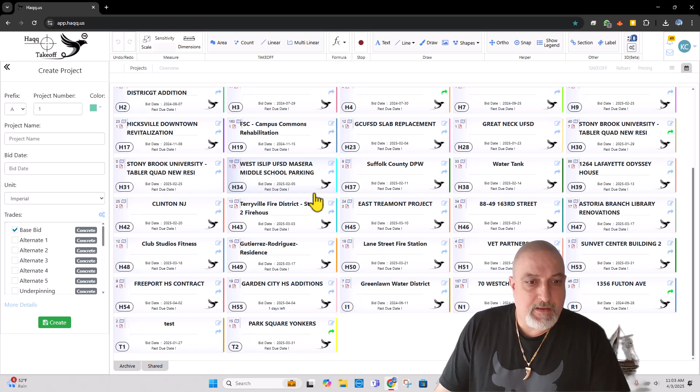Okay, let's get started. Let's sign in first. Takeoff. My applications. And Garden City. H55. And we were right here. So far, let's see what we did. F3, F4. Let's continue quickly. We got this. F4, F5 now. F5.0.

Square footings, column footings. And this is 5 by 1 feet. And what is the elevation for this? Bottom elevation, F5. Where is F5? We need just one. And these are at the middle. This is at the middle, bottom of footing, minus 1'10". Is there any more? Yeah, there are two of them. Bottom of footing is minus 1 foot 10 inches. 4000 psi. Okay.

Rotate this. Five. We got more F5 here. We need to change the elevation for that one. But we'll do that later.

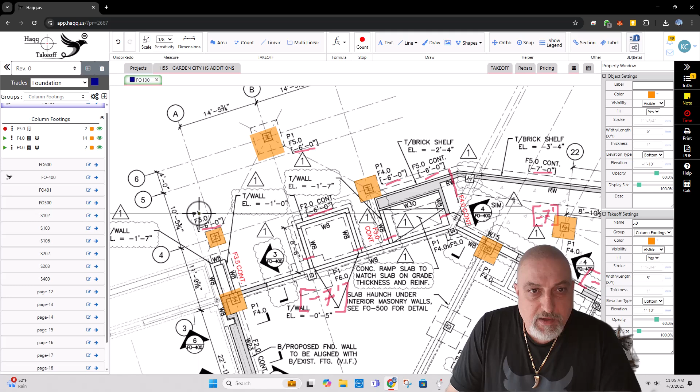Oh, I forgot my microphone. Okay. Hopefully, voice was coming. All right, let's keep going. All right.

And let's change this to bottom of footing is minus 6 feet. And add reinforcing. What's the reinforcing for this guy? Let's do this. 8 number 6. We put 8 here. Times 2 because each way. And save. F6.

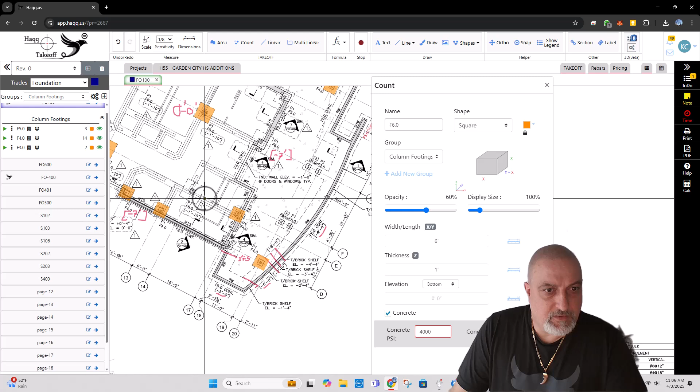0.0. 6 feet. And the thickness is 1 foot. 13 number 6. F6 is 1 foot 10. And this one gonna be minus 7. Minus 1 foot 10. And there's another F5 here. And another one. Alright, let's change this to minus 7. And we had 13 number 6 on this one. Times 2 each way.

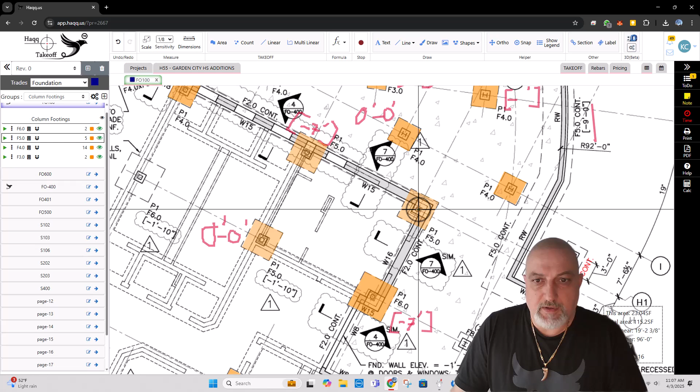And let's add other F5s. We have one here. Minus 7 is the bottom of footing elevation. When I copy this, it will come with the same elevation. So, come on. 7, yeah, correct. Copy. It comes with the correct elevation now. Yep. Okay. Let's keep going. Now combined footings.

These are rectangular. F4.0 by F5.0. These are rectangular. I'm not worrying about XY dimensions because usually X is the horizontal and Y is the vertical way, but these are all twisted, so we have to rotate them. So you can put anything to anywhere. 4 feet for X, 5 feet for the Y. Thickness is 1 foot, which is standard.

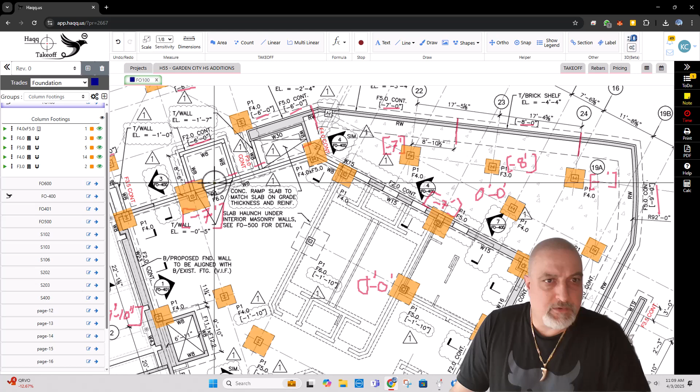And let's see what's the bottom of footing elevation here. 4, 5. Where is 4, 5? Yeah. Minus 6 feet. Okay. Oops. Kind of like this. And there's another F6 here. This F6 was minus 7, so I cannot rotate it. Rotate and move. So that is taken care of.

And let's go back to this and add rebar. What we got here? Number 5, 12-inch on center each way. So XY direction, this is 12-inch on center, spacing 12. It's number 5. This is the 4 feet direction, the short way. Change the direction to Y. This one is X. Now the other way. And the spacing is 1 foot. Change the size. And it changed to 5 feet. So this is the long way. Save, done.

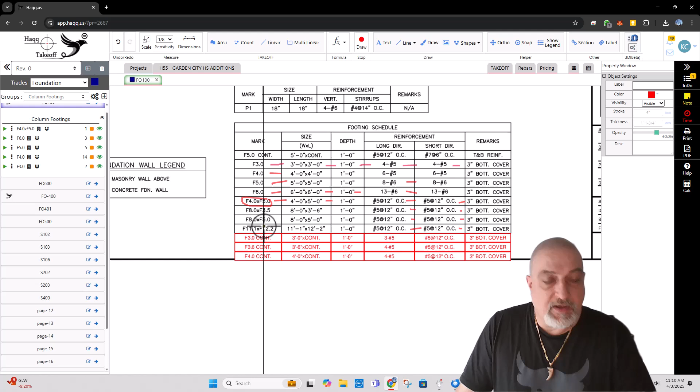Next is the reinforcing. We can copy the reinforcing. See, let me click this. Since reinforcing for all of these are equal, number 5 at 12-inch on center, standard, constant spacing and the size, I can copy the reinforcing from this when I create these. Okay, let's do that.

So we got F8.0 times F3.5. This is 8 feet by 3.5 feet, and the thickness is 1 foot. The bottom of footing elevation for this 8 by 3.5 is here. This is minus 9 feet. Click OK.

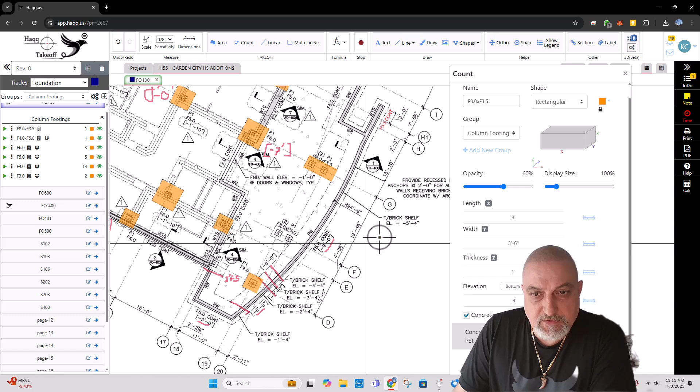Scale is not fitting for some reason, 3.5. Let's just check our entry. We got 8 feet by 3 foot 6 inches. And this is 8 by 3.5. So the drawing must be incorrect, a little bit off, but I'm not worrying about it. Our dimensions are correct. So for the reinforcing, I can just copy from this one now because it's standard. Copy and go here, show rebar, paste.

Let's check it just for you guys. 4 number 5 because it's 3 foot 6. You got 4 number 5 at 8 feet. And the other one, because 8 feet long, it gets 9 bars, 9 number fives, and the size is 5 and length is 3 foot 6. But this wording is not correct, which is okay.

David, okay. Got a phone call. Let me pause this for a second. A lot of distractions. Okay, let's get back where we were.

YX, 3 foot 6 short way, yes, and this gotta be the long way, right? It's not important, just for good work. All right, let's see what else here. We did the 8 times 3.5 and another one 8 times 5. This is another footing right here. 8, 5, and 1 foot.

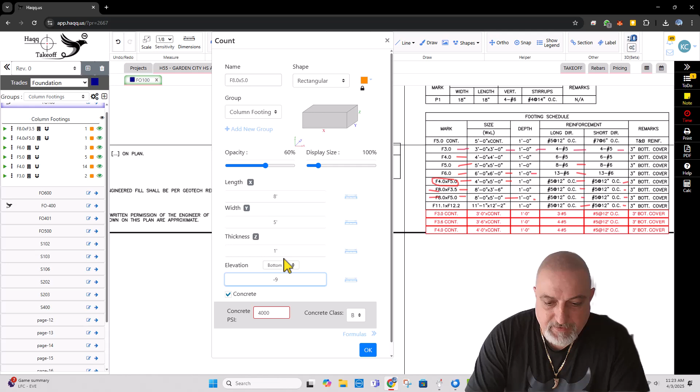F8.0 times 5.0. 8 feet, 5 feet, 1 foot. It's gotta be minus 9 feet. Let's check. Yeah, minus 9 feet.

Yeah, something wrong with this. But if you look at these two, looks like the same dimensions, like this width, and this is 3.5 and this is 5 feet. I don't think they drafted this correctly. Yes, they made it 3 feet. Anyway, let's pass the rebar here.

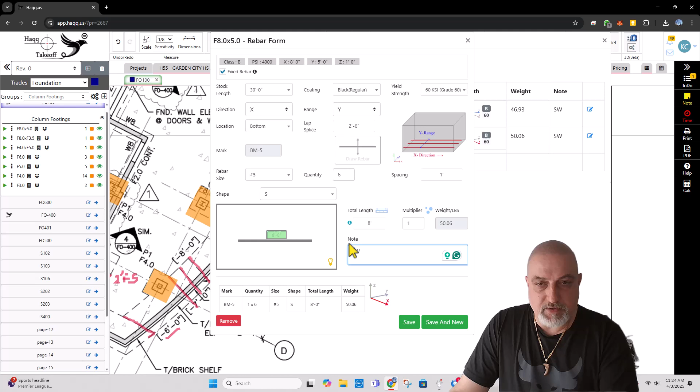Okay, same thing. This is gonna be short way. This is gonna be long way. That's the only thing we need to change. You don't even need to change this. I'm just doing it. Okay, we got the F, and lastly F11.1.

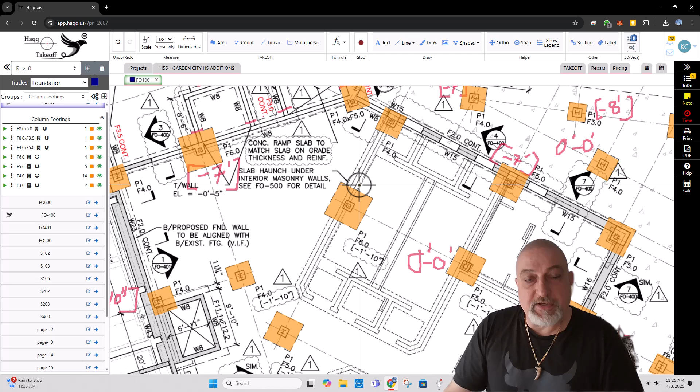Where's that guy? It's supposed to be bigger. 3.5 continuous footing. I can't see. Oh, so I'm missing another F6 here. Yeah. Good thing is Haqq Takeoff, it covers the whole footing. It just doesn't put it like a symbol, little symbol. It covers everything, so you see if you're missing something. That's beautiful.

And let's see what's the bottom of footing for this, 1 foot 10. That's perfect. And I still can't see F11. It's gotta be somewhere. So let's keep going. It will show up hopefully. 12.2 is a wide footing too. There you go. That's the pit. And the bottom of footing.

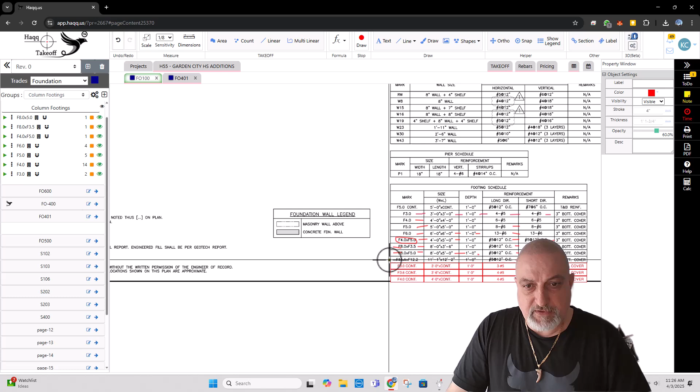Do they give you one? FO401. Let's see this section. FO401 is right here. Top of existing footing. So it's not giving us, and we already figured this. It was minus 9 foot 10 from part 1. So let's do this one. And the reinforcing is the same again. Yes, reinforcing is the same. Let's set that.

F11.1. I mean, most structural engineers don't consider this as a footing. It's a mat slab, but this one does. 12 foot 2. So here 11 foot 1 inch, 12 feet 2 inches. And the depth is 1 foot, and this was minus 9 feet 10 inches. Goes under the column footings. Yep, that's what we have to do.

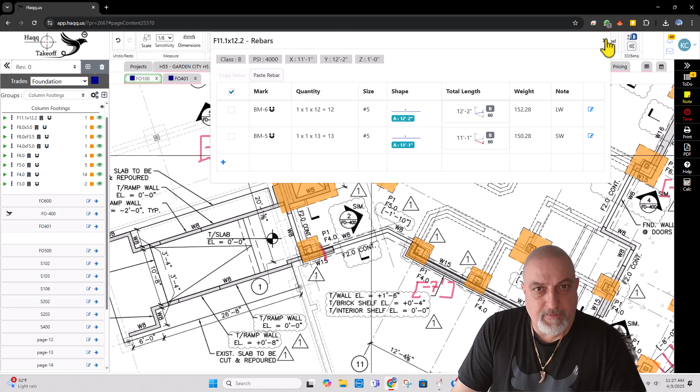Let's twist this, rotate this guy. And add the, no, we need to paste. And now it matches long way, short way. Is it top and bottom on this one? No, still one way. Now let's add continuous footings.

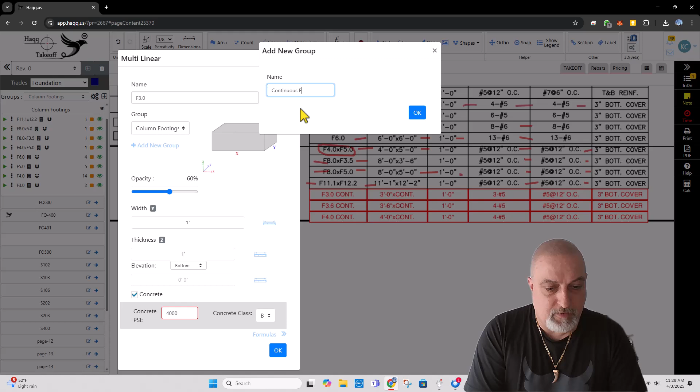Let's start from F3.0. Create a new group. We call this continuous footings. You can call them wall footings. I call them continuous footings. 3 feet wide and 1 foot deep, and I like brownish colors for these footings. Okay, where's F3? F3 is F4, F2.0 here. I didn't see F2.0 in the schedule.

You know what? Let's try to find F3. Still F2.0 here. F3 is shown here. Oh, yeah. This is F4, he says. Just gonna try this. This is 3 feet. And that's 2. Okay, so it's minus 6 feet. This area, no, this one is minus 7. There's a step.

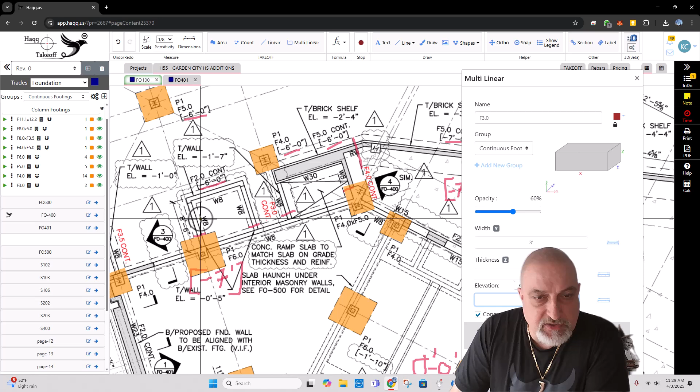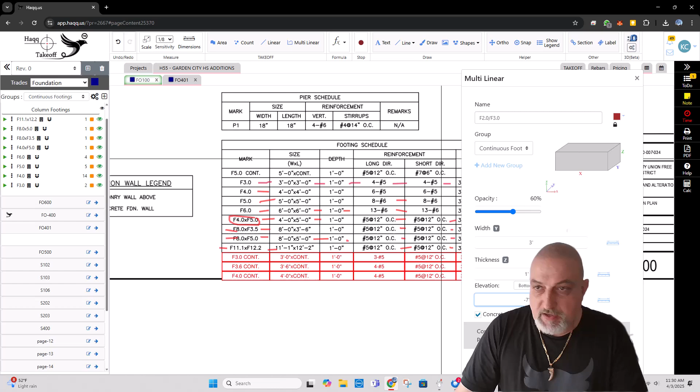So are we doing this or this? Looks like we're gonna do all F3 because there's no F2 in the schedule. We're gonna use F3. That's the closest one. So I'm going to call this minus 7. What are we gonna do about the F2.0? There's no F2.0. So I'm gonna make this F2.0 slash F3.0, but I will use this footing. I'll get some extra, which is okay for unforeseen things. And I got the minus 7.

Let's start from here, going back here, turning for the F2, and still got F2. You may think I'm doubling up on the footings, but not actually.

Another phone call. Hold on a second.

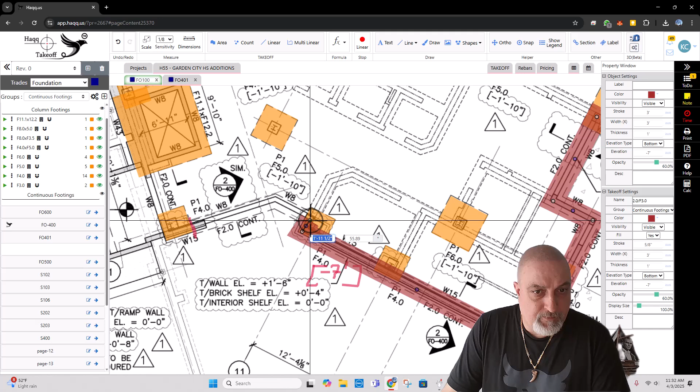Okay, where are we now? Keep going here. F2.0 again here. And footing changes here. We have a step here. Okay, what we'll do on these steps. Okay, let me. Is there a step detail on this? I don't think so. Yes, they have a step detail. Perfect.

All right, let's set up a scale for this page. Okay, we are looking from the top. When we are at the step, currently we are looking from the top. We're gonna change step from -7 to -9'10", right? So these are bottom elevations. Let's look at this. We got here -7 and -9'10". Actually, the other way around.

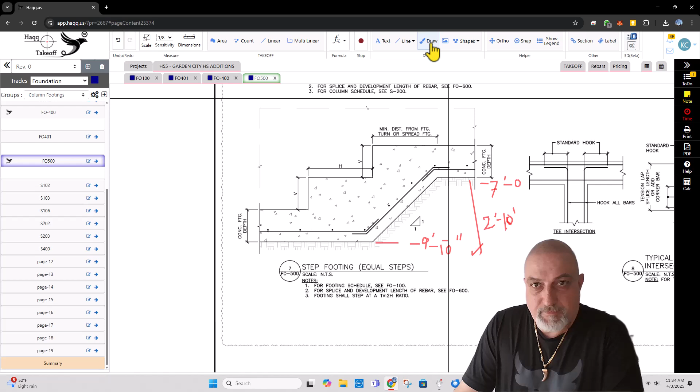-7, -9'10". So in between we got 2 foot 10 inches. So first step will be 2 feet and the second step will be 10 inches. And we are looking from the top. So when we do our takeoff, we're just getting this top area. So we need to add something for this. How we're gonna do it is we will extend this bottom footing to the underside of this second step. Our footing thickness is 1 foot.

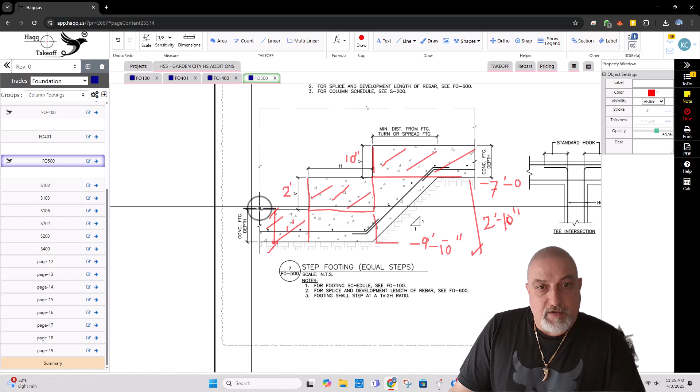Okay, so let's change the color a little bit here. First thing, on the lower side, we got the -9'10". We need to go up to the first step. So we're extending this here underneath this second step. Let's do that. Let's add this F2.0. Where is this continuous footing? So here you go.

So we need 2 steps here. First one we have here, and we need 4 feet in between the steps. So I believe this is 4 feet. And should we get back a little bit? Yes. Let's get back like 4 feet.

3'6". And let's draw this as F2. It's F3 right there. I go up to the middle. Actually, it sounds like here. Somewhere here. Oops, not delete. And this is -9 foot 10 inches.

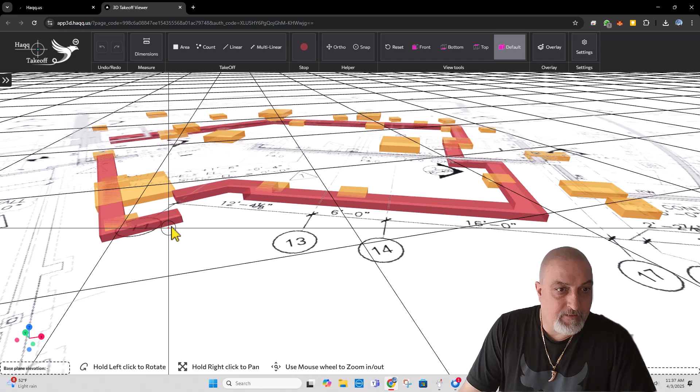Now let's look at the 3D to understand more clearly what's going on there. See, this is what I'm talking about. This is the footing at the -9 foot 10, bottom of it, and this is -7. Now we want to apply this detail. So what we said, we're gonna take this lowest footing up to where the first step is. First step is here. Okay? Now, let's go back here.

Now, between first and second step, we have to add 2 layers because our footing is only 1 foot. And bottom of this footing will be minus 8 foot 10. And bottom of this footing will be minus 7 foot 10. Let's keep detailing.

Between two footings, two steps, we say, right? From here to there. And bottom of first one is minus 8 foot 10. And second one, I'm placing right on top the first one. And elevation for this one is minus 7 foot 10 inches.

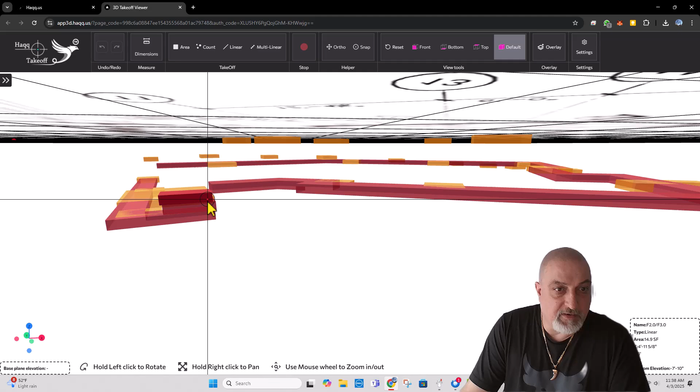Let's look at the 3D. As you can see, we build up something. This is a little off, don't worry about it. We build up the distance between. Now we need to step this up. Now second step will be 10 inches. 10 inches. It will be a little thicker here.

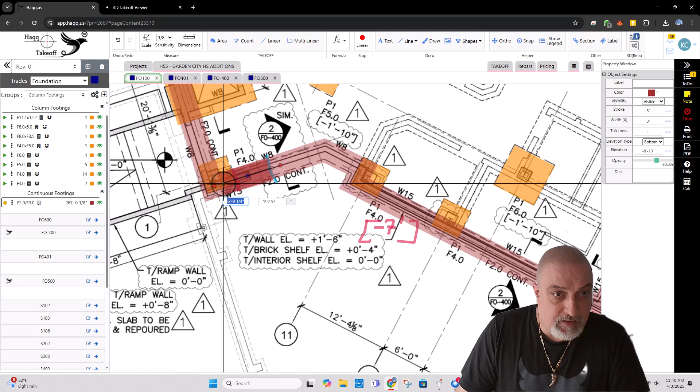But what we didn't do is these two layers we took in between the steps, we should have extended them a little bit more to cover this area, right? Let's do that first, so it can support this footing. It will be undermined. Okay, let's see. Edit. Take it up here, and I gotta send this back. Edit and extend the same amount. There you go. I fix it.

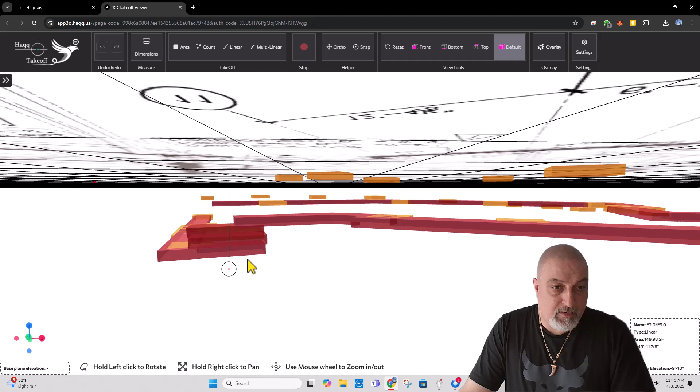Now I'm gonna do the 10-inch step, which will be our latest. Actually, it will create a step. I don't need to do anything, I guess. I just need to extend this up to somewhere here. Bring this to forward. There you go. Now makes more sense. I got 2 foot step here, and one step is actually supposed to be on the angle a little bit, but I got a little bit extra concrete here, which we need for unforeseen things. That's our first step done.

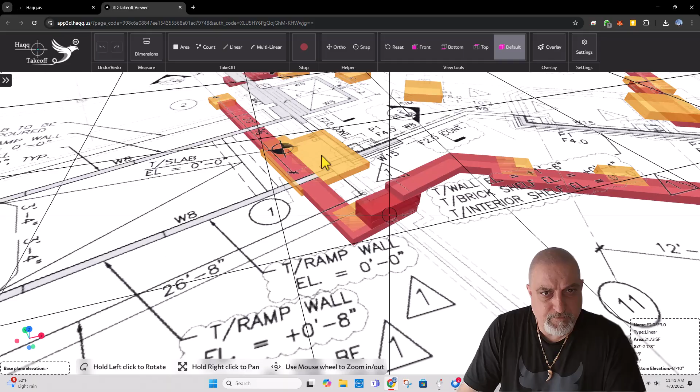Okay, what else are we missing here? These are F2 also. And this is at the minus 6 feet. And we do that first. Let's get them back a little bit here. Minus 6 feet. Minus 6 feet. And this guy is here. There's a foot difference in between. Let's see if I can move this guy.

Okay, we just need to add another footing at the minus 7 foot elevation and take it underneath this to support it. And this is already minus 7 elevation. A little bit past. There you go. And that's it. These are our footing steps. Okay, so F2.0 and F3.0 are finished. Let's add the reinforcing. That will be pretty easy.

F3.0, 3 feet by 1 foot, 3 number 5 continuous, and number 5 at 12 inches on center short way. So the x direction shows the long way. So this is correct. So we have just continuous 3 number 5s. We'll say continuous. Now I want to add corner bars, 3 number 5s, which will use lap splice for the corner bars. When you press L, it uses a lap splice for the number 5.

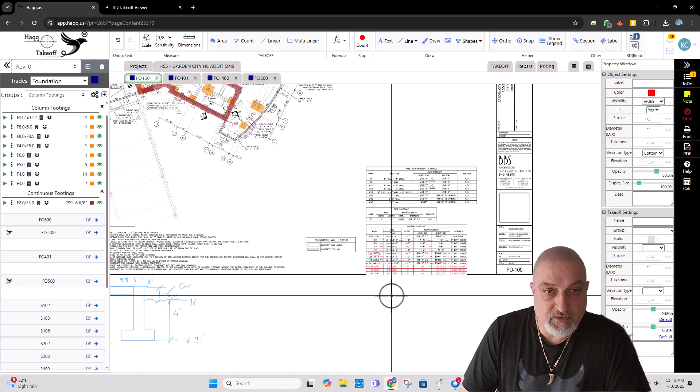And I'll call this corner bars at how many locations? Let's count them up. I will have here, there, a lot of corners. I'm just gonna add here, and press escape. So 17 locations. Now short way, the y direction is the short, which is the 3 feet, and 1 foot on center, 300 bars, because the length is 299. So number 5, short direction, short way. So pretty much we're done with this F2.

And next footing is F3.6. Next footing is F3.6. F3.5. 3.5 feet by 1 foot. And bottom of footing is different. 3.5. We do have here. This is F3 also, so we forgot. No problem.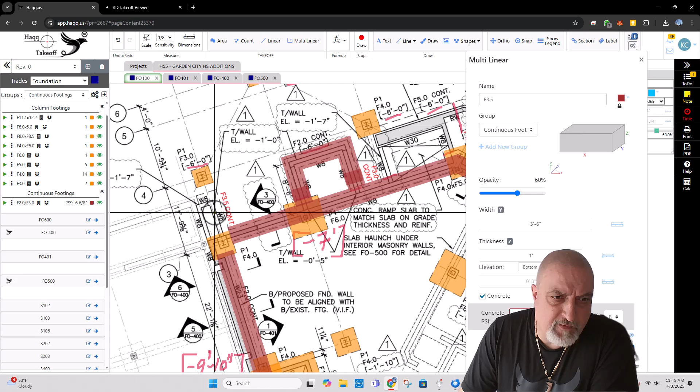3.5 here. So I will say -9, because this is -9, 10. -9 feet and 10 inches. I add 3.5 here. Go up to the end of the footing. Okay, I'm gonna continue with F3, finish this part. I'm just gonna give a little bit here for the step. Change this to -6 feet.

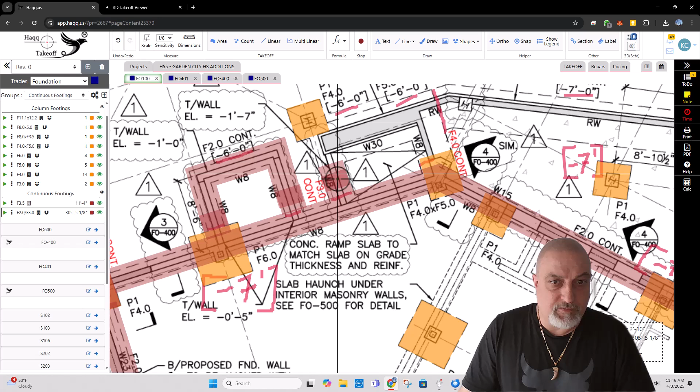And go under on this. So we created the step. This is -7, -6. And all this -6. That's the one at the back, actually. How do we turn this? Let's do clean. Let's reset this a lot better.

Hey guys, here. See, that's the one. Okay. Now F3.5. Do we have that there too? Yeah, this is the part. Okay, F3.5. We have another one here. Let's continue. And that's about it. Press escape. And this is at -9 feet.

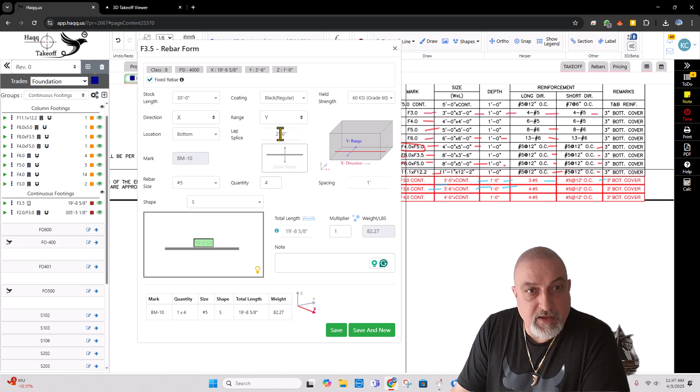Let's add the reinforcing for this guy. What does it have? It says 3.5. It says 3.6 there, right? Yeah. They meant to have the same thing, I believe. For number 5 continuous. The default always gives you the continuous on the footings and the walls. I mean, walls actually consider horizontals. Here, footings, the first default values are direction X and range is Y, meaning continuous bars. Okay, number 5 continuous.

Continuous. Save and new corner bars. Why do I say corner bars? Okay, continuous bars, let's see. This is the footing. Continuous bars are placed like this, right? And like this. Some drawings don't require it, but usually you have to place a corner bar here. That's the corner bar. Okay, now let's place the corner bars.

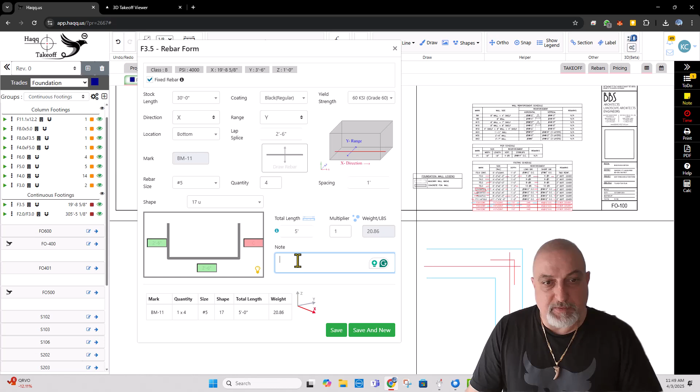It was number 5. We pick up the U shape. We just use 2 sides of it. This is the corner bar, 2'6", 2'6". The extension is the lap splice. When you press L here, it gives you the lap splice automatically. We call these corner bars.

And how many corners do we have on these guys? I have one corner here, and I will have another corner here because this bar is gonna come here, come there. Okay, 2 locations. New, now short direction, short way, 12 inch on center, number 5's I believe, yes. Pick number 5, short way, save.

Okay, another phone call, just hold on. All right,

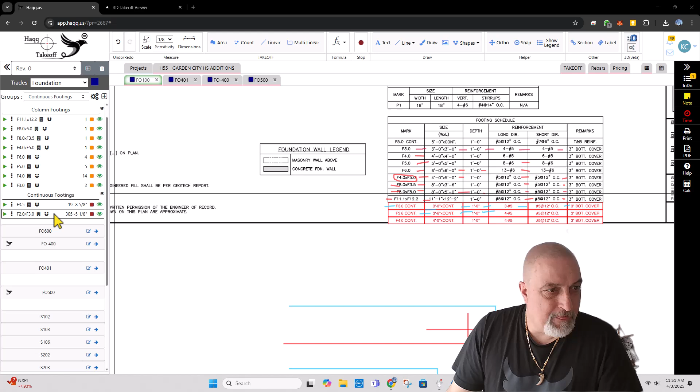let's go back again. F3.5, next footing is F4. F4.0, 4 foot by 1 foot, most likely, yes. And F4.0 is used only here, F5 here. F5 there, F5. Maybe here it doesn't call it, but we're gonna take F5. Everything looks like F5. So here is the -6. -6 feet.

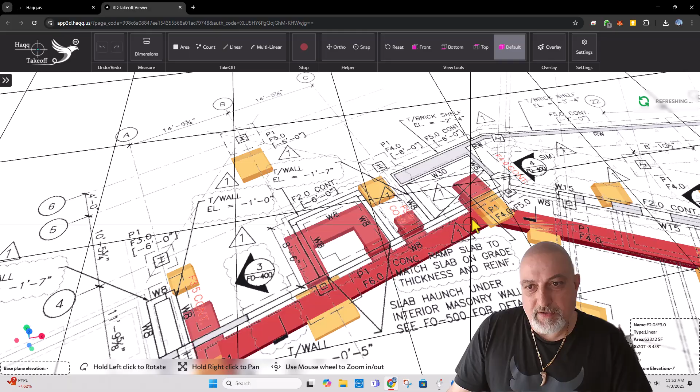F4 is only used here, so I start a little bit back, like this. And I extend a little bit to the underside and call this -7. So we create the step. I hope you guys understand how I created that step. You can see it's there. The column footing is at -7 also. Let's put this column footing at the -7.

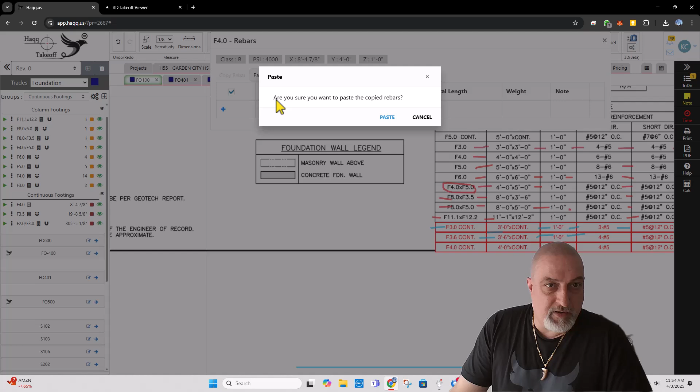I just got lost. Yeah. So that's the column footing. Okay. Now let's set the rebar. One corner bar, obviously. Rebar was 4 number 5 again, number 5, 12 inch on center. Since these two are the same, I can copy everything from F3.6 actually. Copy to F4, paste. Only need to change the quantity of the corner bars to 1, that's all.

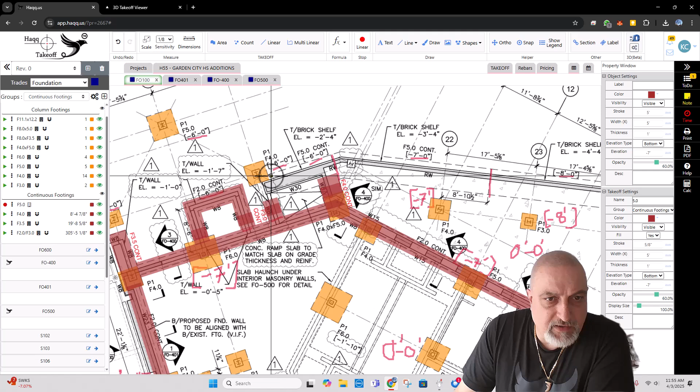We're done. Now we're going up here, F5.0. This is the last footing, wall footing. 5 feet by 1 foot. And it has different elevations, but let's start with -7 feet bottom. Over here, it says -5 feet. Let's start this side, -7 feet, right? There you go. Actually, this is -6 feet also. Okay, we separate it like that.

When you double click, it finishes. So you have to finish the footing to be able to separate the elevations so you can enter different elevations. How do you do this? This looks like an arc, it's not straight. When you press A, it gives you an arc, and you gotta click on the midpoint of the arc and the end. There's no step there. Let's continue like this, and another arc. And this is the midpoint over here. Press A. And we need to double click here.

And this is the lowest one. So the lowest one will go under actually. So we extend the lowest when we're doing the steps. And this is the next step, goes underneath the higher one. And this is the next step, the higher. And this should be the 6. Still on the arc. And this has to go underneath the higher one too.

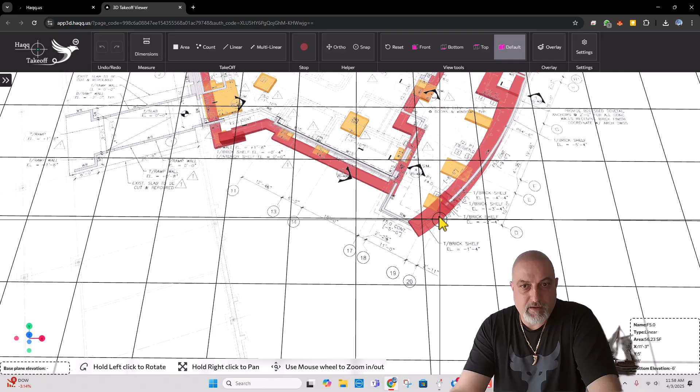Okay. Let's start adding these elevations. This -6 feet. This is -7 feet, which is good. This is -8 feet. -9 feet. -8 feet. Our default is -7, so we don't need to change that one, but we need to change this one to -6 feet. And we are at the -6 right here, right now. Let's reset this. So it looks good, right? We did a good job.

Only we need to extend this. All right, go back. See, these footings need to be supported under the higher part. On the steps, we have to take them underneath. So here, this is the lower part, extending to the higher part. Just a little bit here. This is lower, goes under the higher part. Same thing here. So we covered the step footings. Now let's keep going over here. F5 I'm gonna take from here to the end. Then we're gonna adjust this.

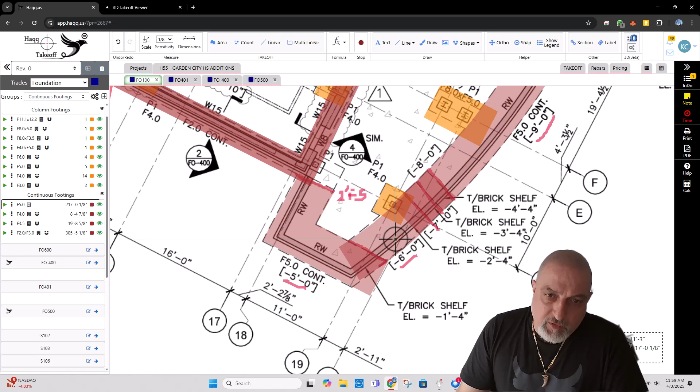This is -5. And we already took lower -6 underneath the F5. Now what's going on here? It goes to the -7 here. And this needs to become from -7 to -5. So we got a 2-foot footing here, a 2-foot step.

So I'll start at the -7. Imagine I'm going underneath the higher footing to support it. But if this is at -5, this is at -7. Footing thickness is 1 foot only. -7, we already did it. So there's a gap of 1 foot here. So I have to add another piece of footing on top of this at -6.

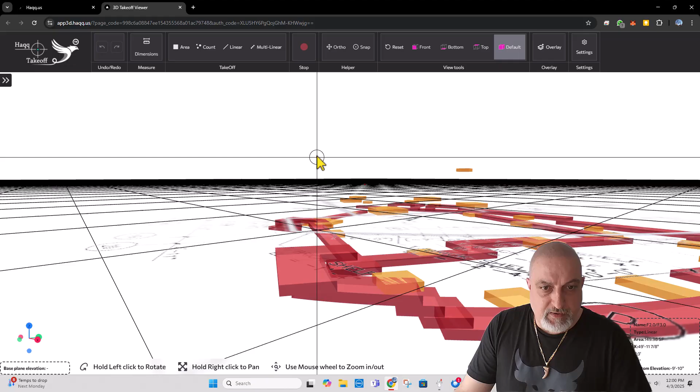Yeah, let me show you before I change it. Let's reset this. Where are we on that one? We're talking about here. See, there is a gap. There you go. This is better. There's a gap. This is at -7, and this is at -5. So we need to create a little piece of footing to support this, which is this one at -6. There you go.

So basically all the footings are done. This is a complicated job. It's already 46 minutes on this video as well. Alright, let's add the reinforcing for this guy. The reinforcing for this is long direction number 5, 12-inch on center, and the short direction number 7, 6-inch on center, top and bottom. Let me see if there is a section here, 1FO 400. No hooks, nothing, so it's good.

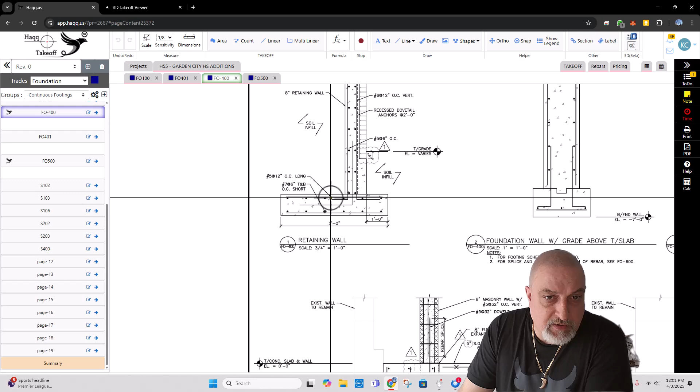But they showed it the other way. They pointed at these as the long bars, these as the short bars, but they pointed wrong. Okay, let's add the rebar. Long bars were number 5, 12-inch on center. So its direction is the long direction, 226 feet in this case. Change the size of the rebar, that's all you have to do. And 12-inch on center, and this is continuous. You can say continuous or long, but top and bottom. Save and new.

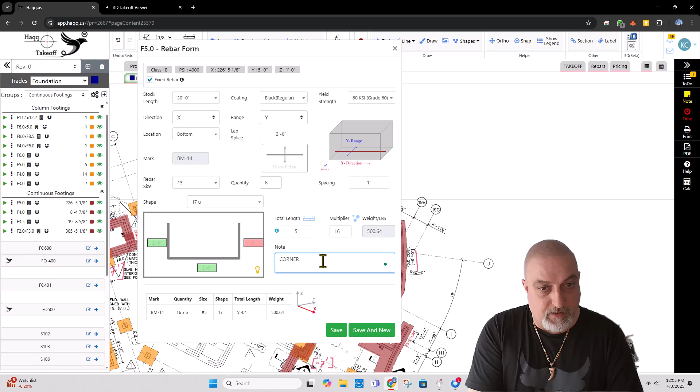Alright, now we have to do the same thing. We have 6 bars, right? Number 5s for the corner bars. Now let's count the corners for F5. We have a corner here, corner there, corner here, here, and there. 8 corners, but since it is top and bottom, I'll do 16. Corner bars, top and bottom.

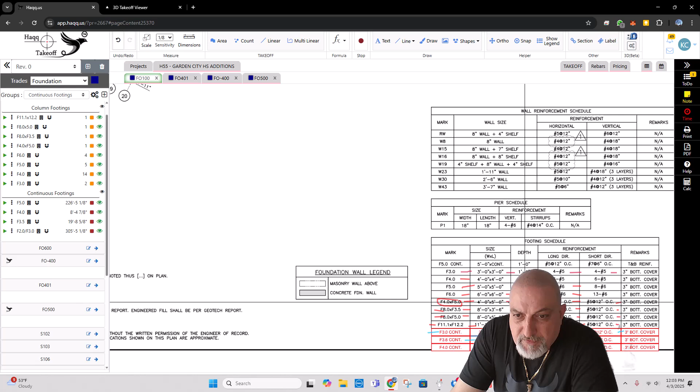And now we're gonna do the short way direction. Number 5. No, it's not number 5. Number 7, 6-inch on center. Number 7, and spacing is 6-inch, so quantity changes, short way, and this is top and bottom. So pretty much we're done. Okay, footing is 1 foot, right? Alright, let me tell you one more thing. Thickness of the footing is, oops.

We have a top bar condition sometimes, not in this case, but let me explain it. In this case, it's a 12-inch thick footing, F5 footing. But when we have a top bar, we have to consider what's underneath. If we have 12-inch concrete below the rebar, then this bar is considered a top bar. Our footing is 12-inch already, and rebar coverage is a couple inches, 2 inches most likely. So we have 10 inches. So our bar isn't considered a top bar.

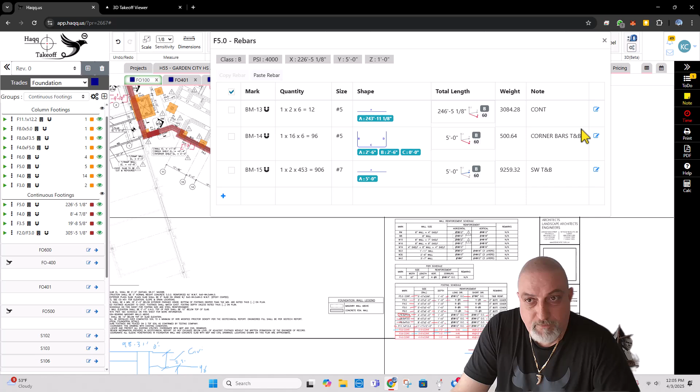But if we have 12-inch, we have to separate. We can't do top and bottom both together. We have to select the top, and it will change when you look at the length, 252. When you change it to bottom, it gets shorter. So we have to consider the location of the bar, whether it's at the top or bottom. So far, we finished the footings and the reinforcing for the footings. And this is what we have.

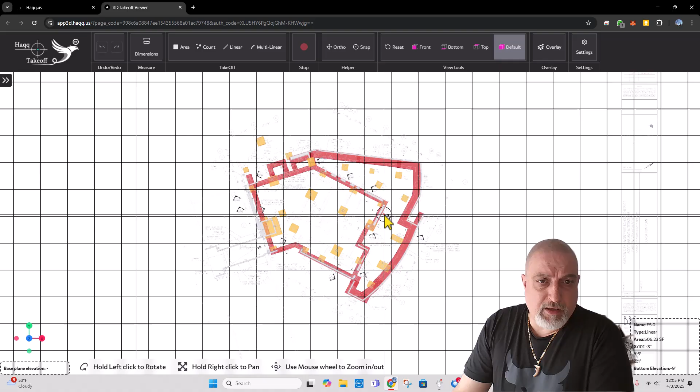I think this footing is at the wrong elevation. Yes, this footing is at the wrong elevation. Let's check that one. It's not plus 7 foot, it's minus 7 foot. See how 3D helps you? Now everything fits correctly. I didn't put the wall dowels and column dowels in the footings because it is a lot easier to do them together with walls and piers.

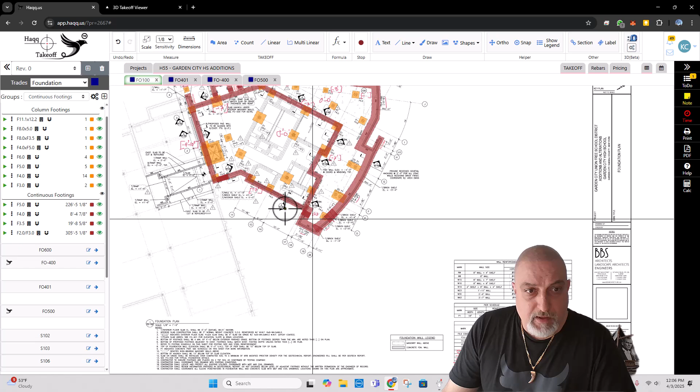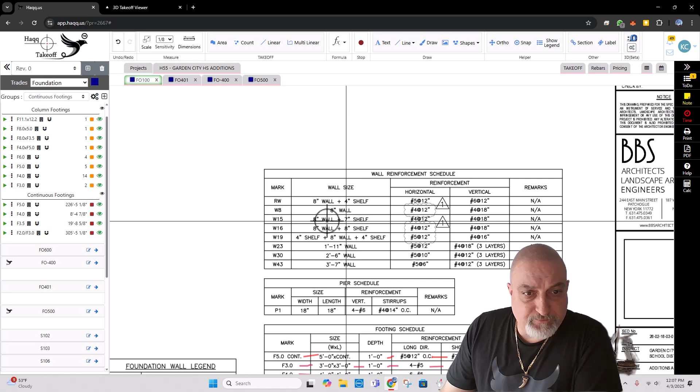Okay, now we're gonna do the walls. Let's start with the ones right here. This is wall W15, probably 15 inches. W15, 8-inch wall plus 7-inch shelf, which is 15-inch. Horizontal bars number 4, vertical bars number 4, 18-inch on center. Let's look at the section detail. Where is the 4? This is our detail. And it starts from here. And top of the wall is,

we don't know. This is a 5-inch slab. Let's say top of the wall is 1 foot below the slab. Okay, let's start. W15, and the height of the wall will be 5 feet. Let's study that before here. This is the active window. We were wrong actually. We need to have the active windows here. All right, F41.

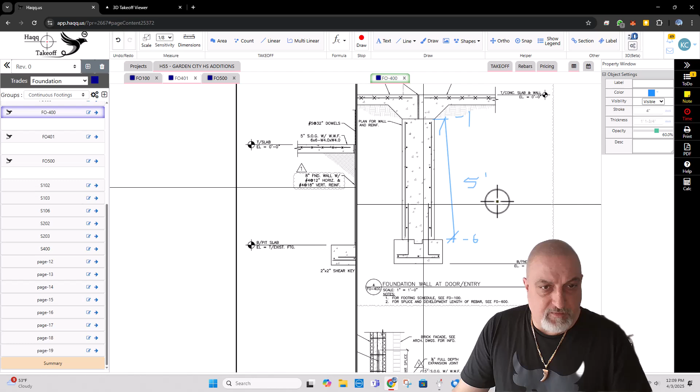Set the scale for this page. We didn't set it, surprisingly. Okay, bottom of footing is -7. It's given already. Top of footing is -6, and this is -1. So wall height is 5 feet. 400. Okay.

Collapse this a little bit. W15, 5 feet. And this will be what? Walls. I select green tones for the walls. So this is 15 inches. There's no shelf. It says shelf, but there's no shelf. Anyway, 15 inches and height is 5 feet. And bottom of the wall is -7 is the bottom of footing, so it's -6.

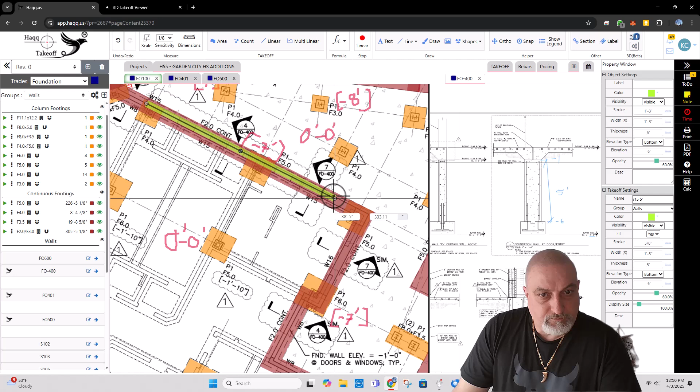It starts from here. Continues here. What's going on here? It finishes here actually. W15. No, we got W16 here. When you double click the anchors, you lost the anchor. Too many walls and too many wall types. Unnecessary, but that's what they have.

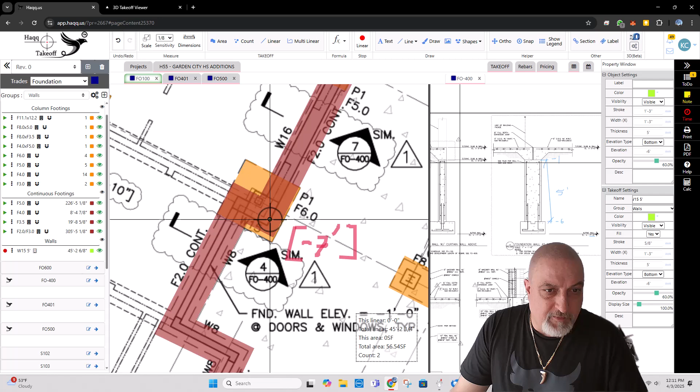W15 here. This is W15, W15 there. And we have another W15 here. And it starts from here. That's a W15. And it goes W8. Like this. W8 there. I think that's it. That's it, the rebar.

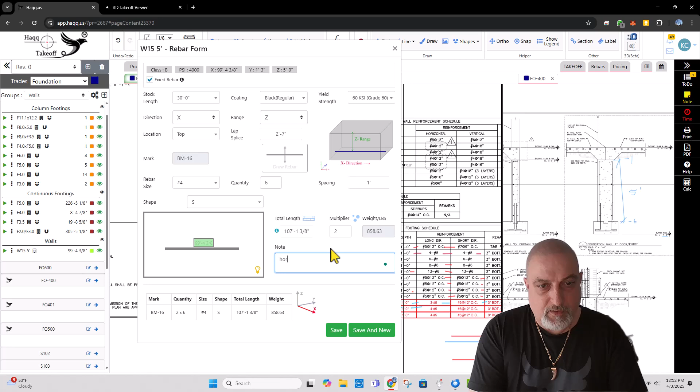Rebar for this W15 is number 4 horizontal. Okay, horizontal bars X and the Z. As you can see, on top of each other, not next to. Direction is X, and all the horizontal bars considered top bars. And then number 4, and it has both face times 2. Horizontal each face. X, Z, same thing we adding for corner bars.

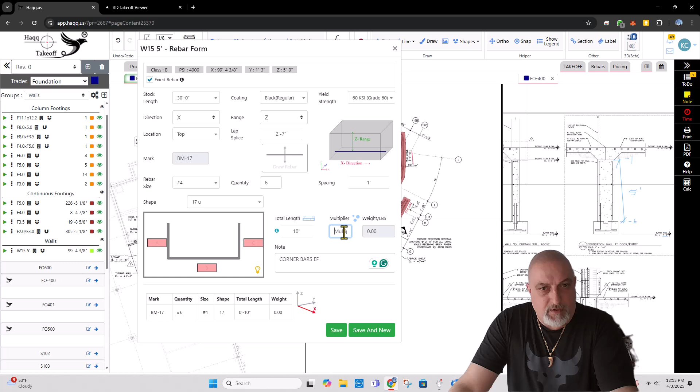Nah, what I'm doing. This is corner bars each face. So whatever the corner count, we multiply by 2 because of each face. We have corner here, corner there. It will have corner at the both ends. Okay, 10. Problem in the database. Sorry, here. Let's do 10. Okay, now, okay.

Now we do the verticals on the X is the range. Verticals are what it says for the verticals. W15, number 4, 18 inch on center, number 4, 5 feet times 2, vertical each face. If you want to save a little bit on rebar, we can combine dowel and vertical together. And 5 feet, we add the footing thickness 1 foot, so total will be 6 feet, and we call this dowel and vertical. And we'll be done. So what we did is instead of having dowel and a vertical separate, we made one bar.

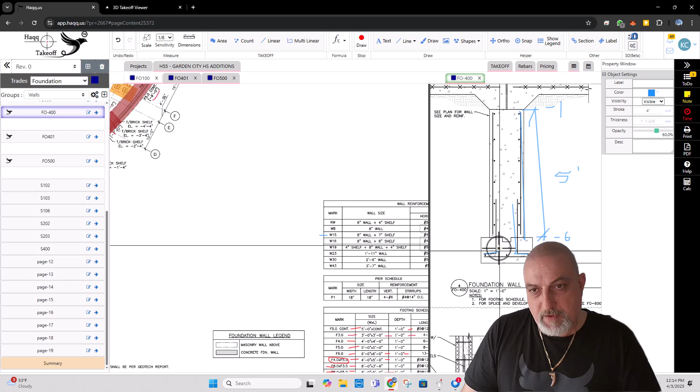Okay, let's go back and see what we did here. We need to refresh. We have a problem on this. When you create group, it doesn't refresh it at the moment, but we'll fix it. Okay, so these are the W15 walls already added. Now next wall, let's do W30, 43. Oh, it's crazy. Okay, next wall with the W8, and the W8's reinforcing is also same as W15, and even this guy has the same reinforcing. What's this one? W16. Okay, let's do the W8 wall.

W8 wall was the one at the, we can say at 7 feet also. W8, 7 feet. It is important to put the name height of the wall so you don't have to look for the dimensions and heights. 8 inches. These 8-inch walls are very important. You cannot put the same price as 12-inch walls for the 8-inch walls. So we'll come to that when we are talking about pricing.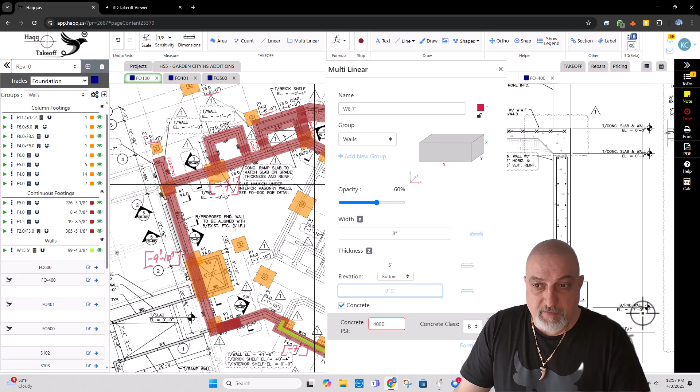Okay, height of the wall we said 5 feet is the same thing. We can look at the 3 of 400. 3 of 400 is, yes, 0 0, yeah. I said 1 foot down. Okay, 5 feet, and the bottom of the footing will be -7, so bottom of the wall will be -6 over here. Bottom of footing is -7 here, so footing is 1 foot. We come up here, bottom of the wall is -6. I hope you understand that. Change to another green tone, and let's keep going. Very tiny wall here.

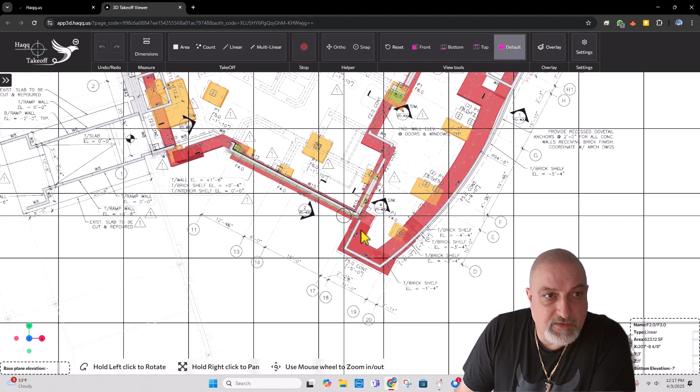Okay, we didn't create step in between this 7 foot to 9 foot 10. Let's take care of that first. I'm gonna leave the wall there. And let me show you what's going on there in the 3D. Let's reset this over here. So we should have 2 foot difference here. See, we didn't connect these footings. We need to step down to this one. And we'll be doing the same step we have here. So I'm gonna back this up. This is 7 to 9, 10. We got 2 foot 10. So we're gonna have 2 steps.

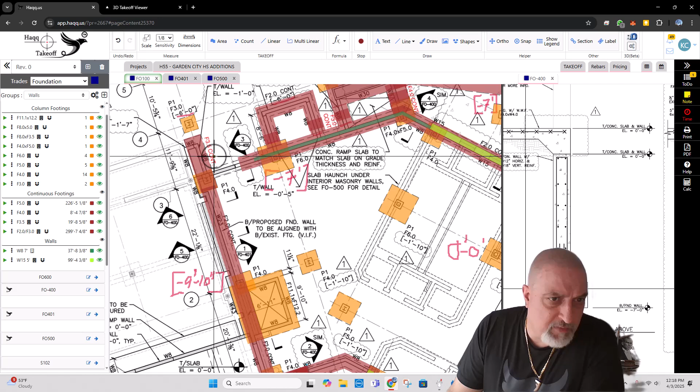Let's back this up here. And this is F3 footing. I'm gonna start with the lowest one. Now let's go with the top one actually. Add it. So let's say I'm gonna have 1 step here. And all of them F3 actually. No, this is F3.5. Okay. Let's snap right on it. 1 footing here has to be 4 foot wide because the step is 2 foot. I finished that right there, and the second one is right here, 10 inches. But second one could be F3.5. No, it doesn't have to be. Okay, now this lower footing. Okay, this is at -8.

No, 2 foot. We have a 2 foot footing, -9. So 9 feet. And 10 inches, -9 foot 10. Let's take a look. What is this triangle? Probably this one. Let's see. Is that the one?

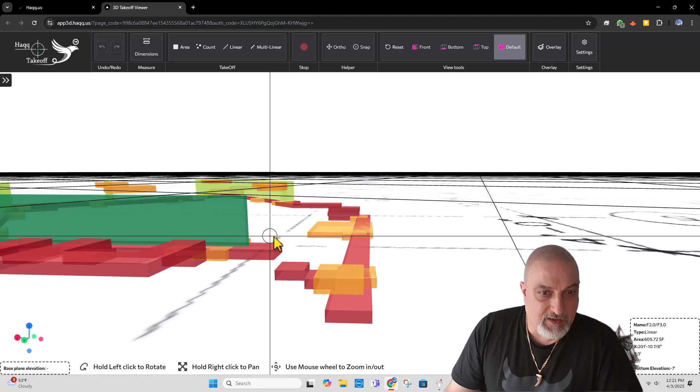Now let's take a look at here. I just need to extend this under here. And I have to extend this under and create another footing in between at -8 feet. This is okay. First step location, extending. Extend under the higher one. I gotta extend this under the higher one. And here I gotta create another, because 2 foot difference in between these two footings. I have to create another footing right there. And I'm creating that here. This is about -7. It's gonna be at -8.

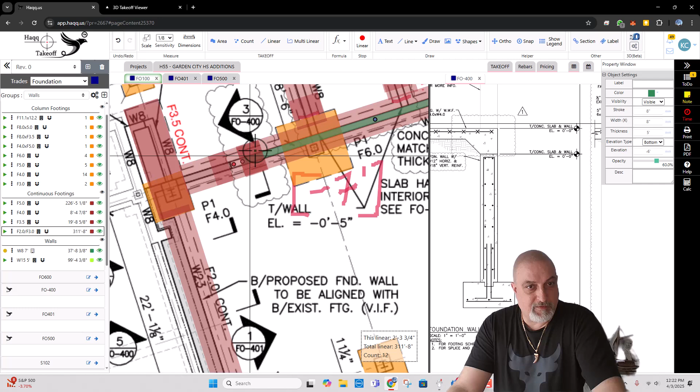Where is it? Hey, here you go. Okay. Now I gotta take this wall up to the first footing, at the first step. Okay, let's send this back. Send this back. Let's set the forward already. So we're almost there. Okay.

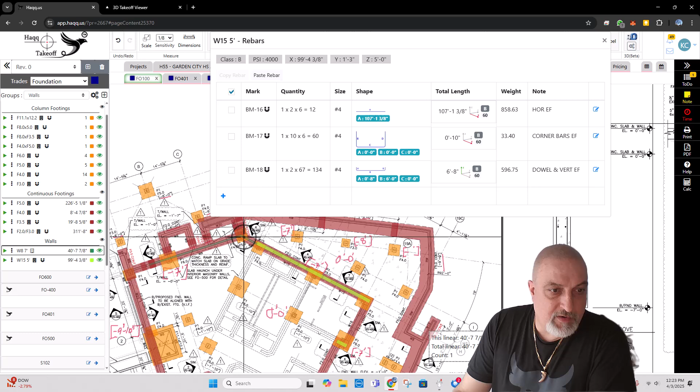Now reinforcing for the W8 is the same as the W15. So what we do, we copy everything. We have one corner here only. Actually, yes, for 5 foot wall. We have one corner. And we're gonna call 2 because of each face.

Alright, now W8 got 2 foot difference here. Now this was 5 feet, so this is 2 foot difference, gonna be 7 foot wall here. Just between here. W8, 7 feet. 8 inch, 7 feet, and bottom of footing is -9 feet. Just here. Okay. Sorry, we gotta do top of footing. Bottom of footing -9, but bottom of wall is -8. We can adjust from here. -8 feet. Exactly.

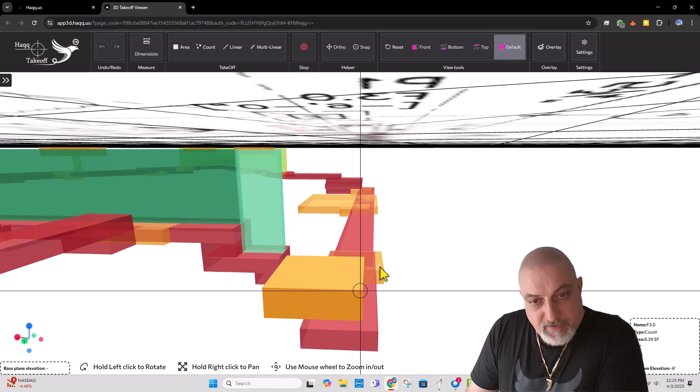Now we got 10 inches difference here. So bottom of footing. Why this footing is, there you go. This was showing up. Bottom of footing is -9'10" here, so bottom of wall is -8'10". And 10-inch difference in between here. Is this wall gonna be 7 foot 10? W8, 7 foot 10. 8 inches, 7 foot 10, -8 foot 10. And that will be here to this guy. And that's about it.

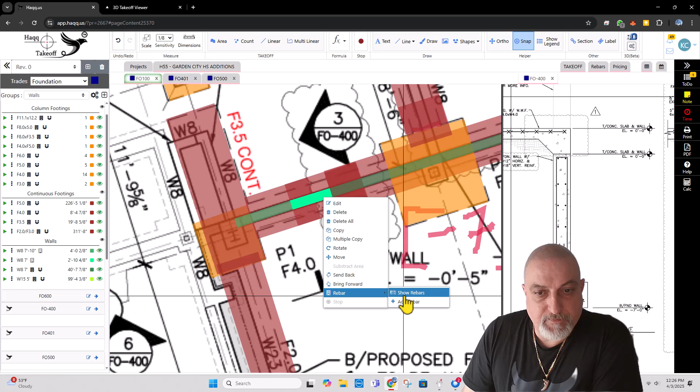Reinforcing. Let's show rebar. We don't need to get the corner bars. I just need horizontal, dowel and vertical. Copy. Dowel and vertical is gonna change. That's okay. Dowel and vertical now is, what's 7 foot wall, so here is gonna be 8 feet.

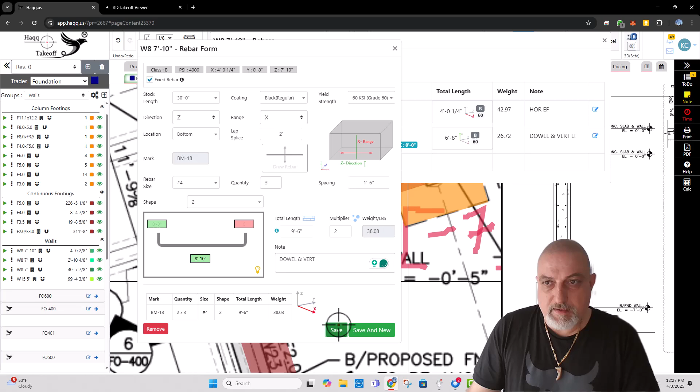Save, and this one, show rebar. On this one is already 7 foot 10, 8 foot 10. This 8 foot is a little high. When you have dowel and vertical together, it may swing, but I will keep it that way. This is, yeah, dowel and vertical. Let's keep it dowel and vertical. And I can add a corner bar here or onto these. Let's see. Okay, we're up to there.

Now W8 wall. Bottom of footing is 9 foot 10 here. So 8 foot 10. Well, let's look at this. 6. This is 7. 6. So these walls get haunched at the top. Like this. This perimeter wall doesn't get it. So top of wall is 0, 0. So if top of wall is 0, 0, top of wall is -1, it says here up to here. Okay, top of wall is -1 foot 7. It gives you the top of wall, surprisingly. -2, 4 there. Didn't give the top of walls for the ones I have, right?

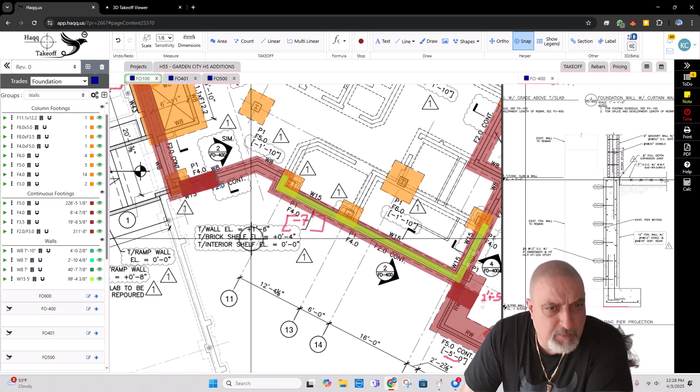Top of wall +1 foot 6. Where is this? 2 FO-400. See? So we already messed that up on this one. Top of wall is +1 foot 6. I'm gonna delete this. It was W15. Let's correct that already. 5 feet over here. W15, any more W15? I'm gonna join that to this one. Okay, let's see. W15.

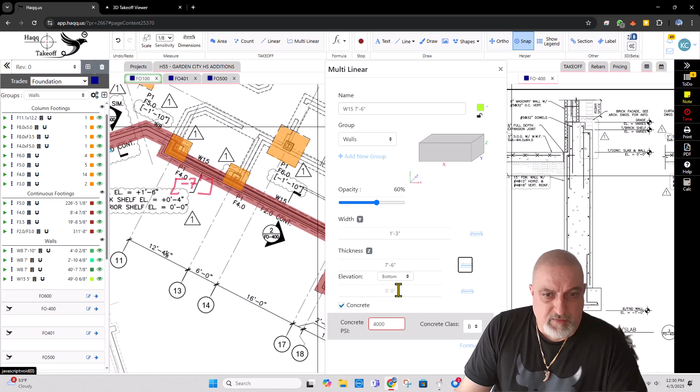Top of wall is plus 1'6", and the top of footing is -6. So 7'6". W15, 7'6". And the bottom is -6 feet. I'm getting this from here, there, and turns this way. So we took care of that too. And the reinforcing will be the same as this one. Only thing, it has 2 corner bars. And each face of 4 bars.